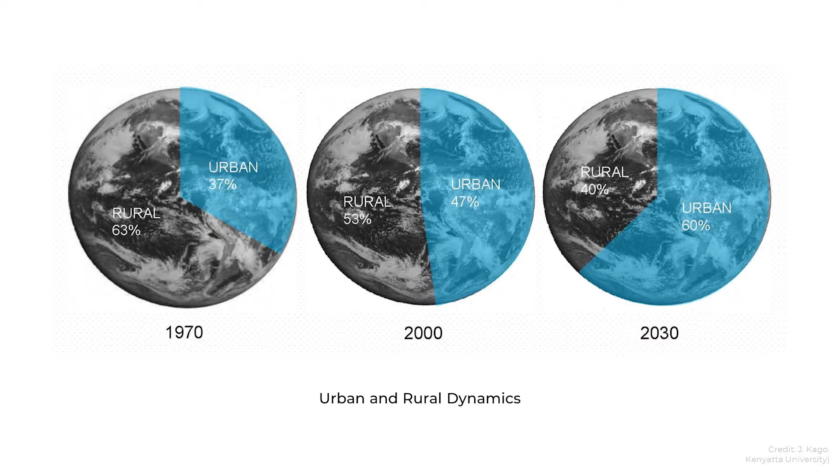Rapid urbanization has been one of the urgent issues across the globe in the past few decades. According to the Population Division of the United Nations Department of Economic and Social Affairs, today 55% of the world's population lives in urban areas, a proportion expected to increase to 68% by 2050. As a consequence, more and more cities are now becoming part of larger metropolitan areas.

But what is a metropolis, and how is it different from a traditional city? In the Cambridge Dictionary, metropolis is defined as a very large city, often the most important city in a large area or country. The term itself comes from the ancient Greek word metropolis, meaning the mother city of a network of colonies. Then, the word prominently reappeared in the Western world in the early 20th century with a more modern meaning.

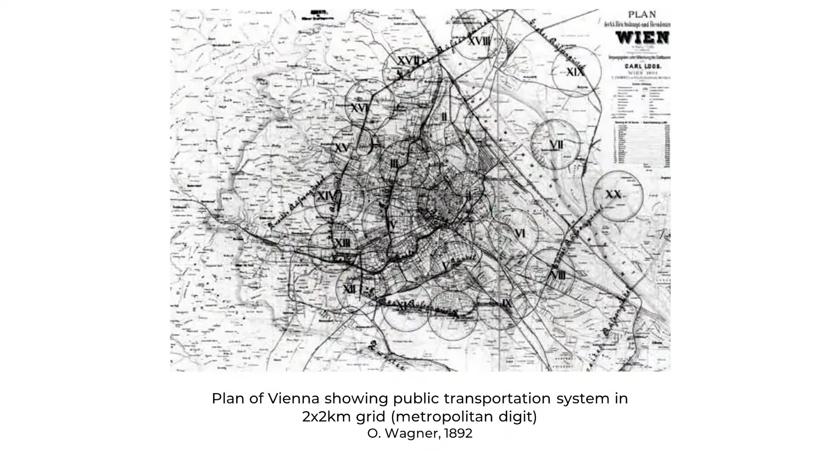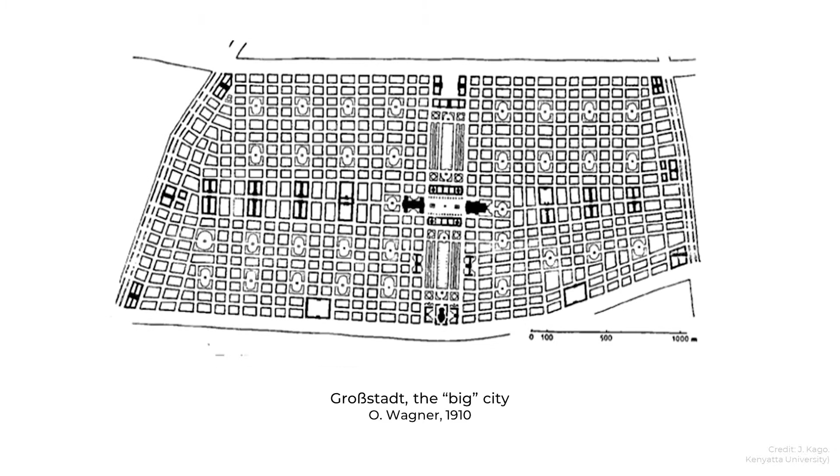It described the urban expansion that had been occurring at different times in different locations around the world over the past 2 centuries. In this context, the use of the term metropolis emphasized the size of the city that had changed. Otto Wagner and Ludwig Hilberseimer were amongst the first scholars who raised the issue of the Großstadt, that is, the big city, in reference to the change of measure and scale of urban settlements in the wake of industrialization in the Western world.

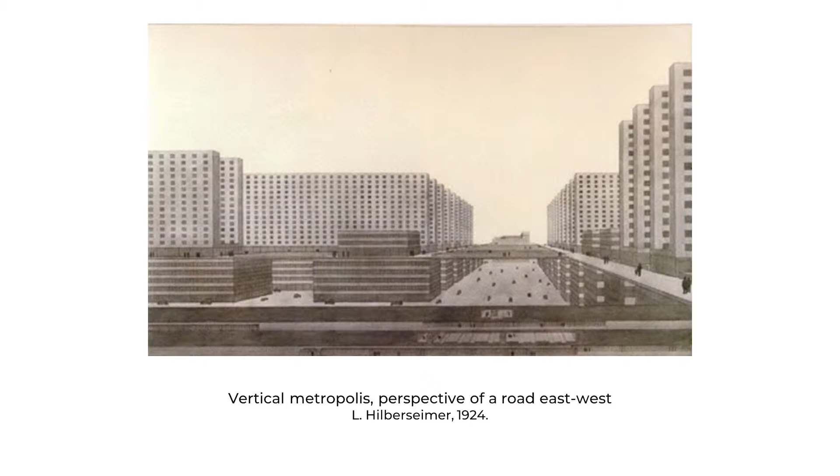The phenomenon of the contemporary metropolis is, however, quite different from the modern industrial big city. Unlike the prediction of early modern metropolis being the vertical city, driven by progress, technology, and science, what we experience now is rather a more complex horizontal metropolis. There are many underlying reasons to this phenomenon that are also complex and intertwined, but here we will focus on the 3 issues of data, scale, and quality of living.

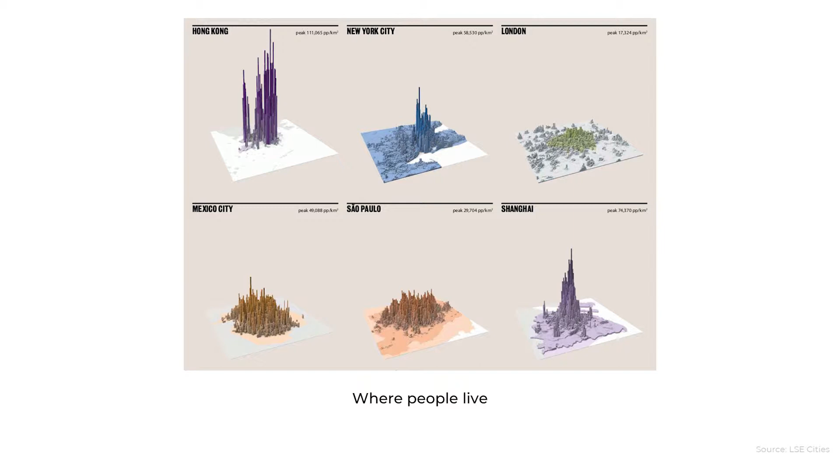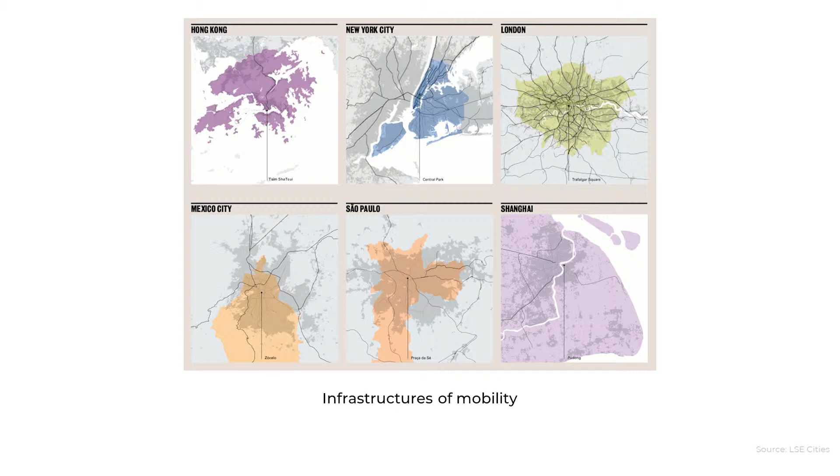Statistics such as population, density, and economic indicators have contributed significantly in shaping the modern boundaries of urban areas and the lives within them. Data is still considered reliable evidence in our time in making significant decisions, from urban planning to regional and national governance. There is no doubt that it has improved our choices in modernizing our lives, both collectively and individually. Data helps us evaluate current conditions, set goals, and measure improvement.

However, there also has been increasing criticism about the use of data. According to urban theorist Neil Brenner, the demographic data supporting the urban age hypothesis are deeply inadequate because they were derived from nationally specific census agencies that define the city and the urban scale using several inconsistent, unreliable, and incompatible indicators. These main indicators, such as fixed population size, density threshold, or administrative classification defining a city, are arbitrarily selected.

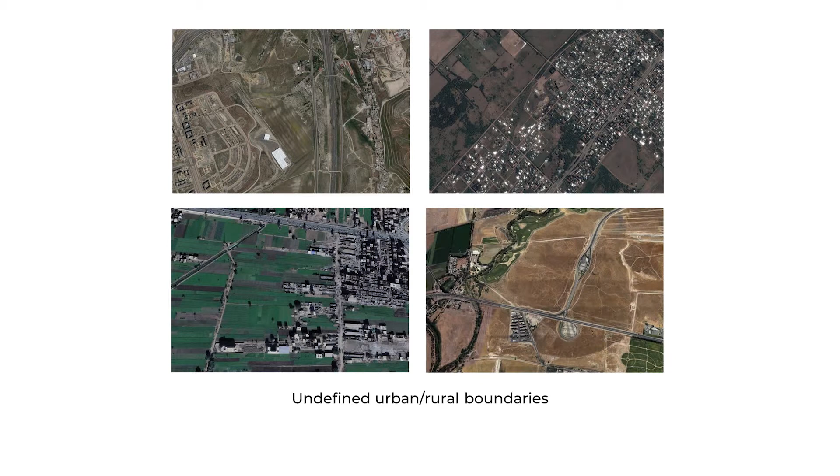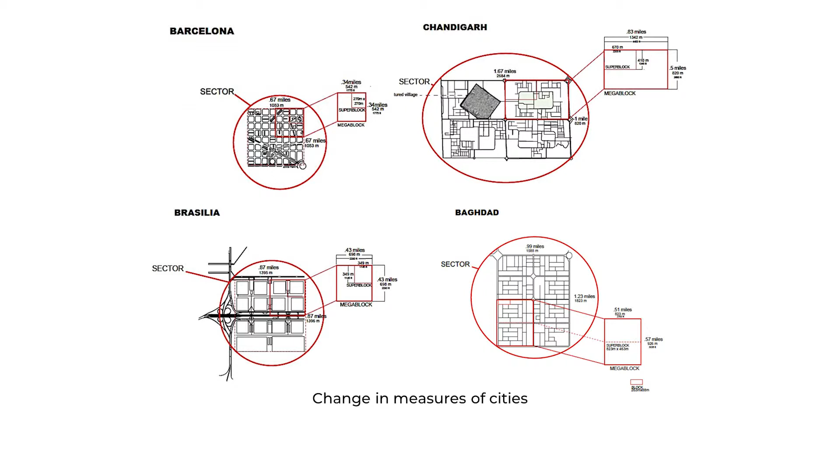However, the boundaries drawn between urban and non-urban areas by this data have significant impact on all the decisions that follow. The variety and complexity of physical transformation of the contemporary metropolis cannot be explained within traditional urban frameworks. A new way of recognizing the metropolitan phenomena beyond the duality of urban and non-urban is mandatory. In addition, the issue of the metropolis cannot be reduced to a matter of quantitative data. In other words, the bigness of the metropolis cannot only be explained with numbers.

The scale shift has also introduced a qualitative shift in human interrelation with and within space, largely depending on the emergence of the out of scale in our spatial experience. The idea of measure has always been closely related to the human scale, which was compatible with the urban fabric and density parameters of historical urban settlements.

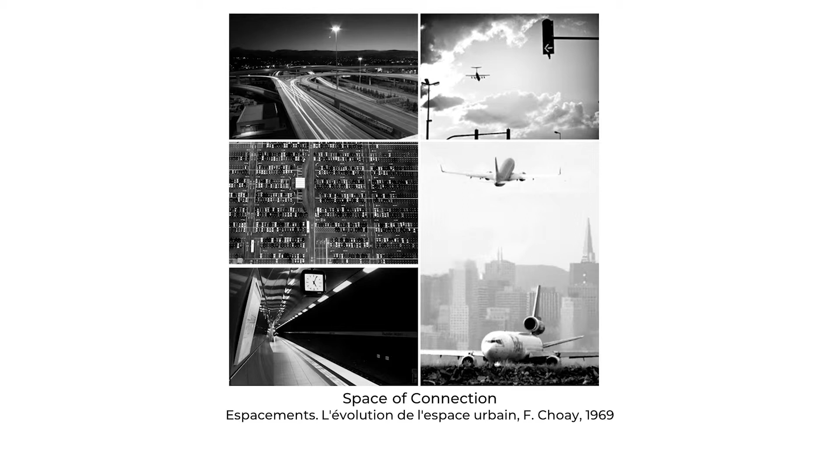Today, however, this kind of relation, typical of the local scale or scale of proximity, is embedded in a larger context of mass mobility of people and goods. This implies a greater order of magnitude in the interactions between individuals and groups in space and time. Geographer David Harvey in 1989 described this condition as time-space compression.

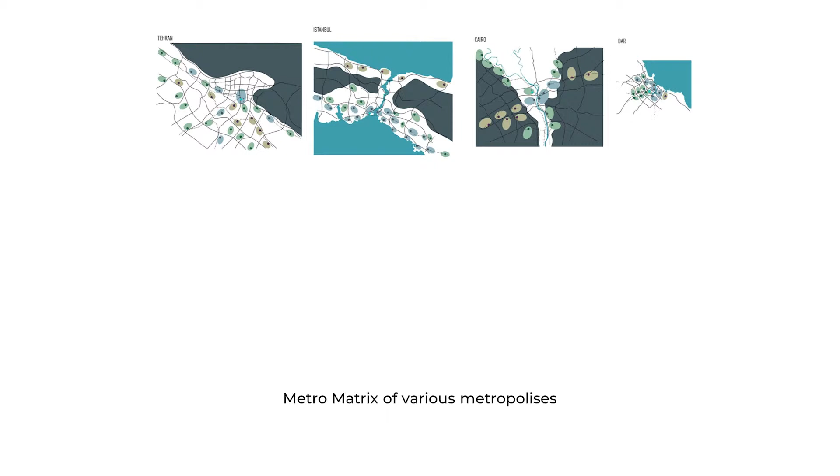This condition enables new lifestyles and behaviors that are in some measure universal and homogeneous, supported by real-time virtual communications and the renewed awareness of natural environment. Yet, metropolitan types vary from one context to another, suggesting that each metropolis still is a result of its own geographical, cultural, and social context.

Mexico City and Milan have apparent differences in quantitative data, scale, and ways of lives, but both, without doubt, are metropolises.

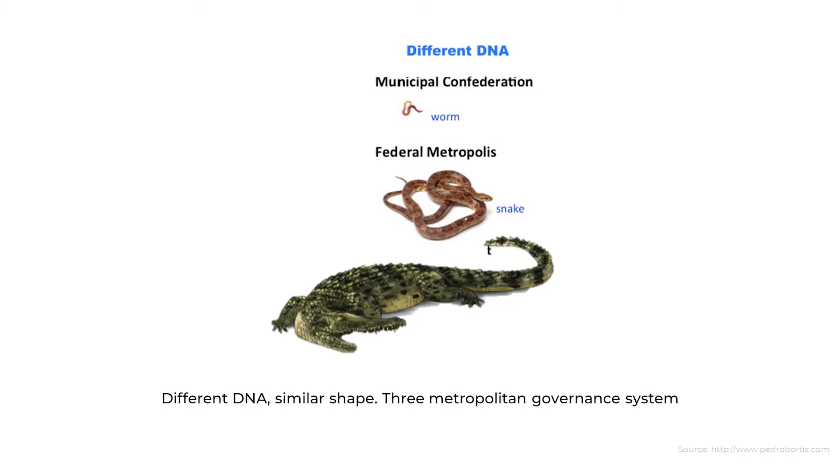In many parts of the world, metropolises are steadily being recognized as autonomous governance and administrative entities, while establishing a sense of belongingness for the inhabitants to a much larger society. However, this doesn't mean urban or city scale don't exist or are not relevant anymore.

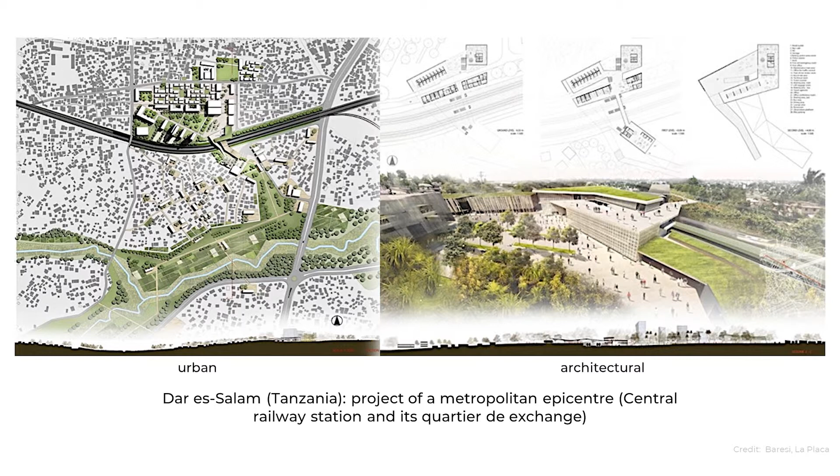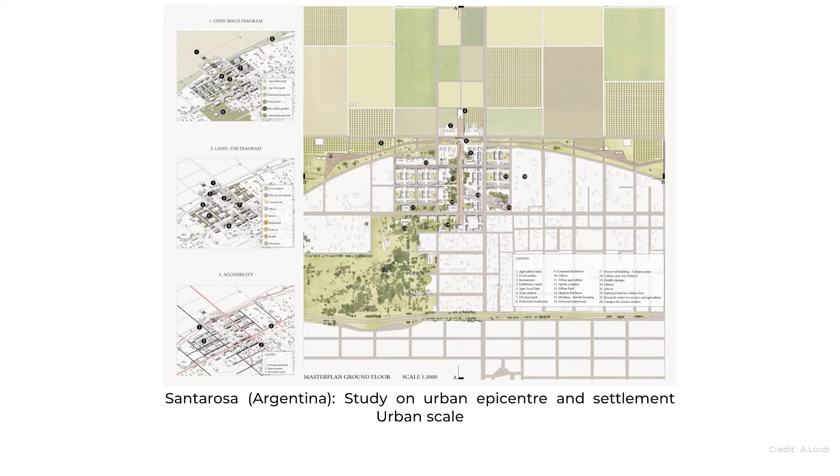The metropolis exists in a scale continuum from neighborhood to nation. It is a specific scale enabling strong relationships amongst diverse agencies working as an entangled system in both the strategic and physical level. Hence, a metropolis has the potential of leaping the scale between the local and the global.

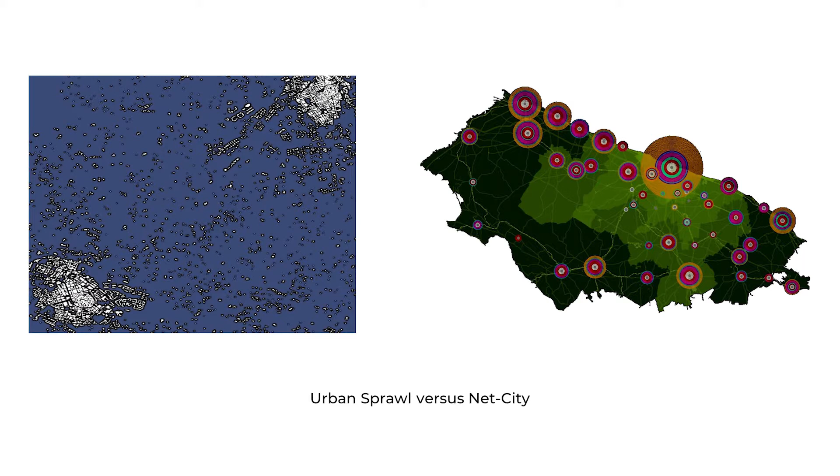According to urban theorist David Grahame Shane, we can think of the contemporary metropolis as a net city. It is essentially a system of cities of different sizes functioning as a whole throughout a network of physical and virtual infrastructure. In this polycentric system, however, we are not only dealing with the nodes and the edges of the network.

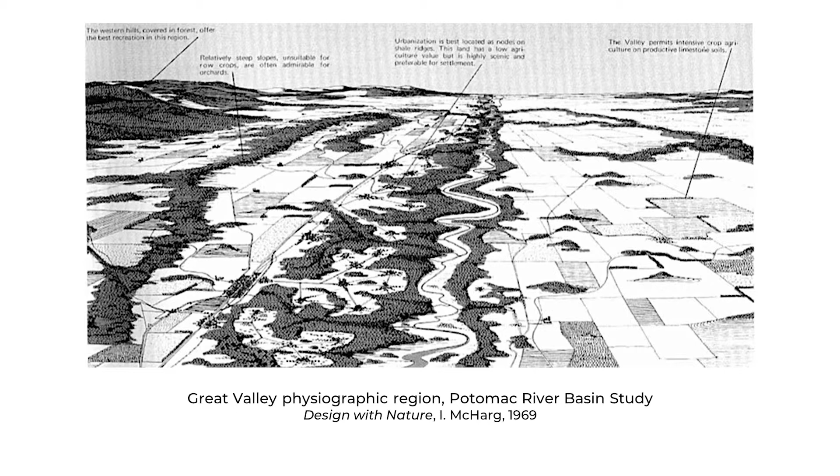According to authors such as Terry McGee, Edward Soja, Neil Brenner, Alessandro Balducci, and many more, what is relevant is that we are facing a hybrid territory where urban and rural scales define a seamless heterogeneous landscape. For this, Shane raises the issue of the void space in the net city, that is, the spaces in between the mesh of the net.

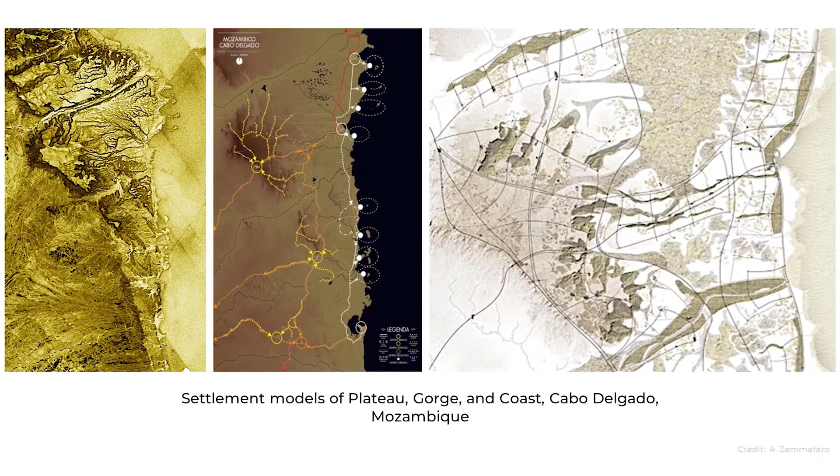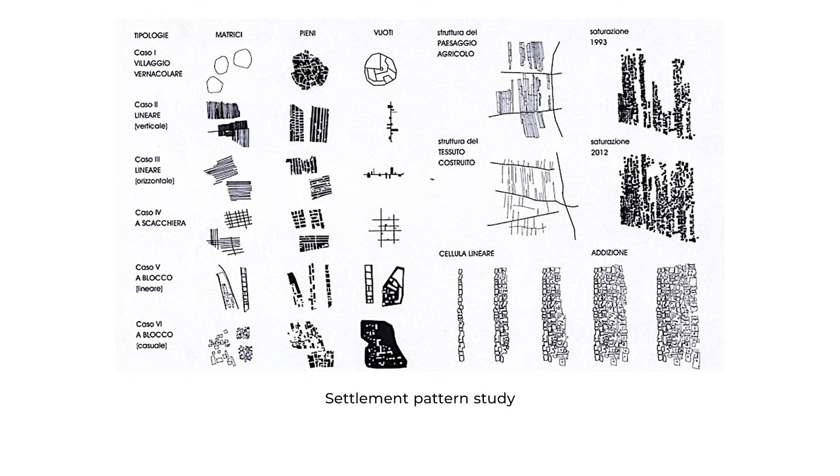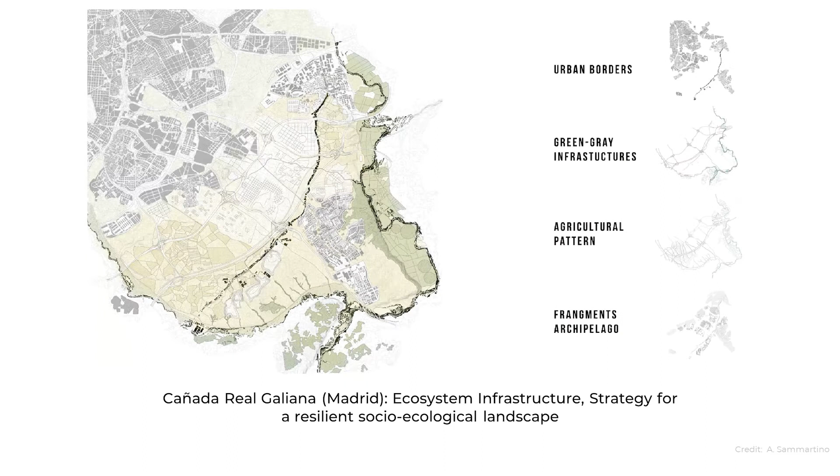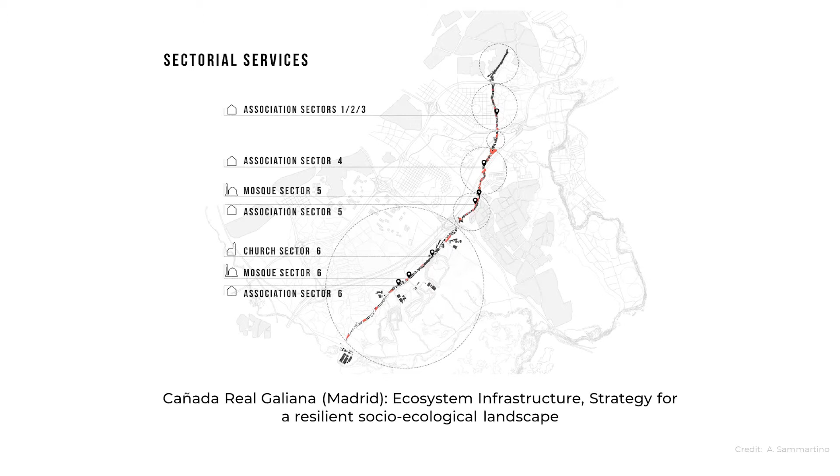This change also fostered engagements of new spatial agencies such as private and public organizations, universities, families, in the interactions amongst global and local forces, challenging fixed administrative boundaries at different scales and requiring innovative forms of institutional organization and planning. The contemporary metropolis cannot be defined by statistics nor be considered as a globally homogeneous phenomenon.

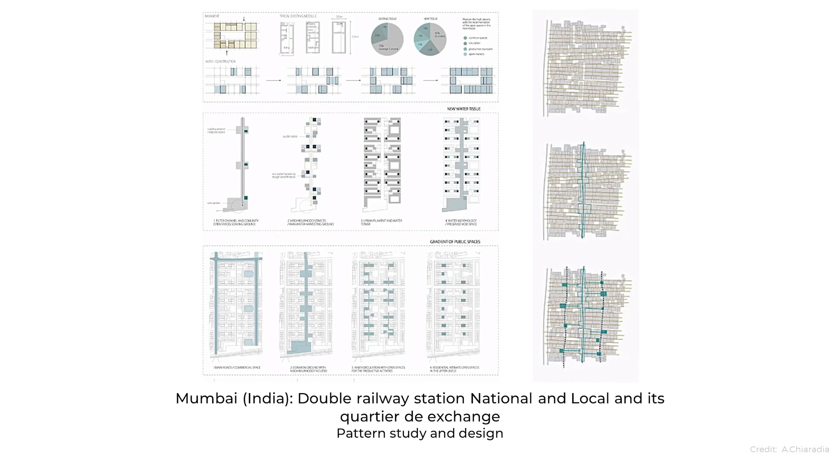Instead, we need to focus on the paradigm shift from city to metropolis that brought us a new way of understanding our living context, the new measure and scale of contemporary lives. Therefore, considering this different nature of the contemporary metropolis and its inherent issues, we cannot understand it within traditional disciplinary boundaries. In the next lesson, we will try to overcome this limit by framing the metropolitan complexity as the basis of the metropolitan discipline.